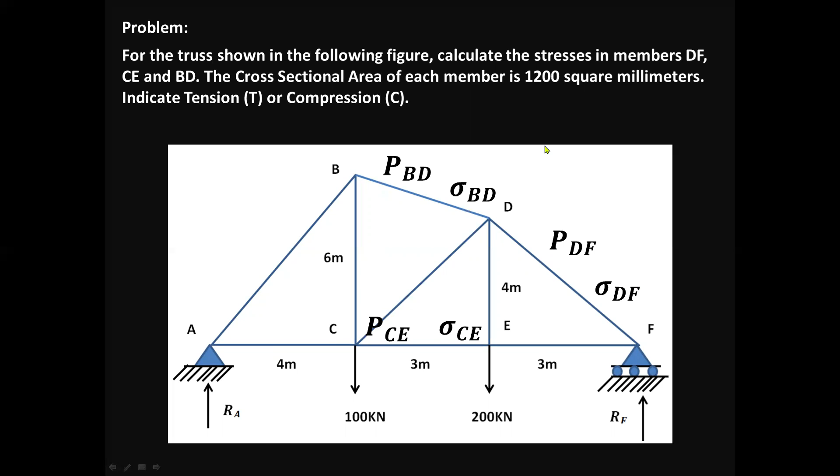Makakalkula lamang natin ang mga sumusunod kapag ating na-accomplish ang ating first step. Ano yung first step? Kailangan nating makalkula ang mga reactions natin sa ating given truss, ang R sub A at ang R sub F. In order to do that...

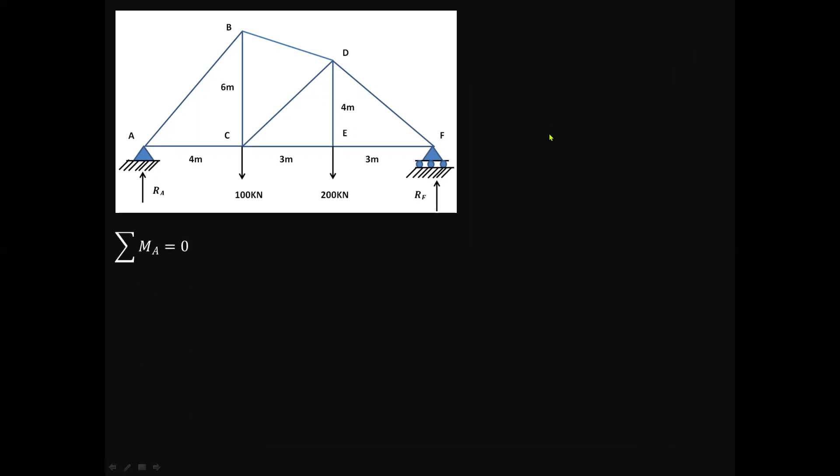Siyempre ito muli ang ating drawing na ating kailangang bigyan ng analysis. Analyze natin kung paano natin makakalkula ang R sub A at ang R sub F. Una sa lahat, summation moment at point A is equal to 0 at ang ating assumption, clockwise moment positive. Negative R sub F times 10 meters plus 100 times 4 meters plus 200 times 7 meters equal to 0.

Bakit negative ang R sub F? Ang R sub F natin ay upward ang direction, kapag yan ay ating na-rotate, ang pinakamabilis na rotation ay actually counterclockwise. Dahil counterclockwise yan at against o opposite sa ating assumption, definitely we will use negative sign.

At ang layo ng R sub F from point A is 10 meters. 100 kilonewton, ang rotation is clockwise if we're going to rotate it. Ang perpendicular distance nito is 4 meters. That is why positive ang ating sign. So we have now plus 100 times 4 meters.

How about the 200 kilonewton load? Ang rotation nito is clockwise. At ang layo nito, 4 plus 3, so we have 7 meters from point A hanggang point E. That is why we have our equation now as negative R sub F times 10 meters plus 100 times 4 plus 200 kilonewton times 7 meter equals 0.

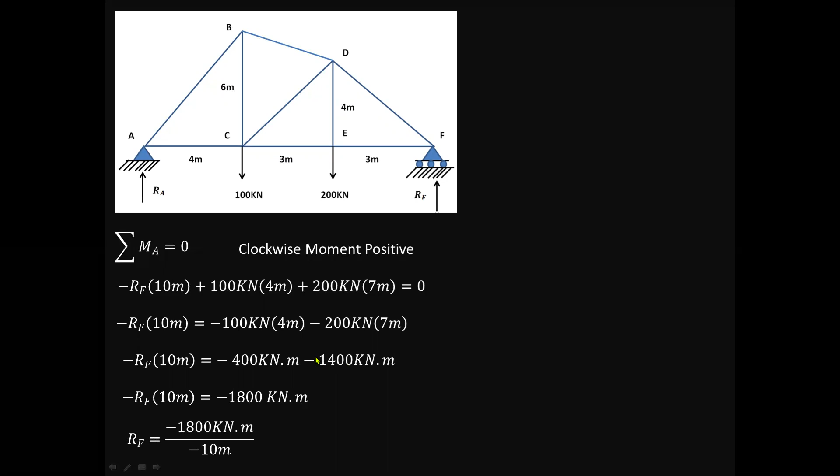Dividing the entire equation by 10 meters, we have it now as R sub F equals negative 1,800 kilonewton meter divided by negative 10 meters. Negative over negative is positive. Cancelado, both numerator and denominator ang meters, so ang matitirang unit na lamang is kilonewton. Ang value ng ating R sub F, ang ating reaction force at point F, is 180 kilonewton.

Next move, summation forces at Y is equal to 0. Ang R sub A natin is upward, therefore this is positive. R sub F is also positive. 100 is downward, we will use negative. And 200 kilonewton is downward, so we will use negative. At syempre, ito ngayon ang ating working equation: R sub A plus R sub F minus 100 kilonewton minus 200 kilonewton is equal to 0.

Now, simplifying our equation, may value na tayo ng R sub F, which is 180 kilonewton, so substitution tayo sa ating R sub F. Ang ating equation ngayon is R sub A plus 180 kilonewton minus 100 kilonewton minus 200 kilonewton is equal to 0. Ang ating R sub A is equal to negative 180 kilonewtons plus 100 kilonewtons plus 200 kilonewtons. Finally, R sub A is equal to 120 kilonewtons.

Ibang paraan ng pagkakalkula ng value ng R sub A para makasiguro tayo na tama ang calculation natin sa ating mga reactions. Maaari naman tayong mag-take summation moment at point F equal to 0. Again, clockwise moment positive ang ating consideration.

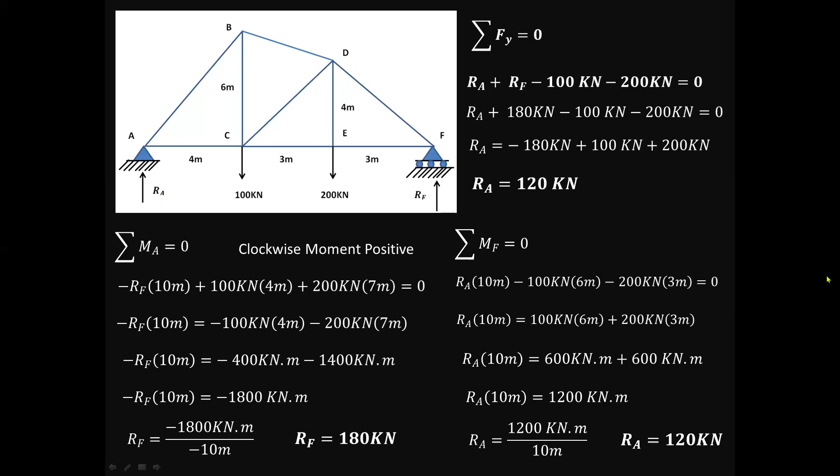So ayan uli ang ating figure. Ang diskarte dito, kailangan calculate muna natin ang ating load DF at ang stress sa DF bago natin makalkula ang ibang mga stresses. Nagsimula ako sa point F kasi nga malapit dito ang mga inaanap nating load DF at ang stress DF. So dito ay ating mapapakinabangan ang ating napag-aralan sa ating statics of rigid bodies.

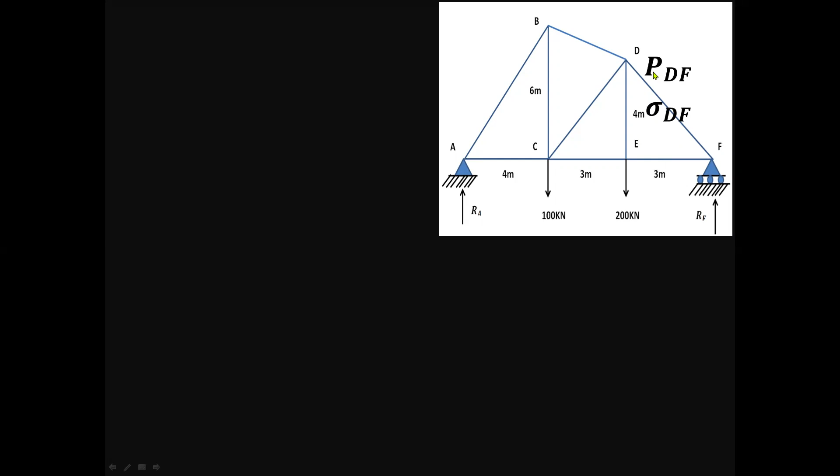Ang topic na ating i-recall, methods of joints. So considering joint F, method of joints, ito ngayon ang ating FBD. I-analyze natin ang ating mga vectors. We have assumed na ang PDF is toward the joint. PEF is away from the joint F. At syempre yan ang ating reaction at point F.

3 and 4 ang ating mga slopes na may hypotenuse na 5. If we're going to take Pythagorean theorem, ang mahanap nating hypotenuse para sa ating slope is 5.

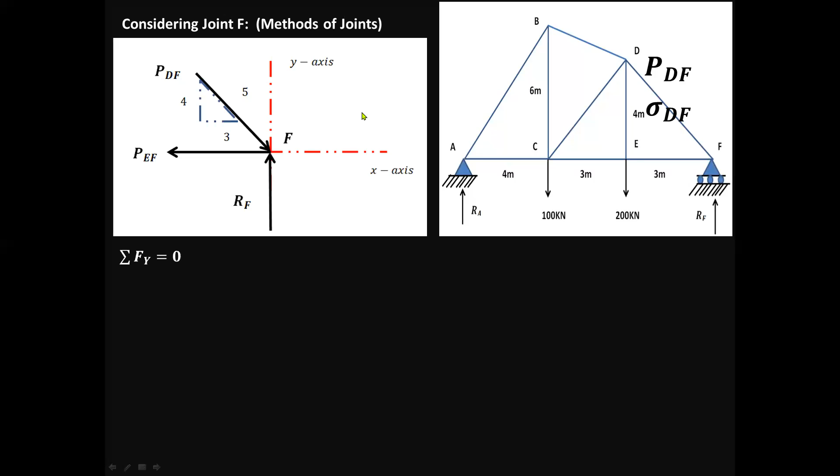Continuation ng ating solusyon. Ano yung susunod na hakbang? We need to take summation forces at y is equal to 0. Next move, ang ating equation. R sub F minus 4 over 5 of PDF is equal to 0. 180 kilonewtons minus 4 over 5 of PDF is equal to 0.

Transpose natin ang ating 4 over 5 PDF sa right-hand side ng ating equation. Now we can already calculate for PDF, ang load ng ating bar DF is equal to 225 kilonewtons.

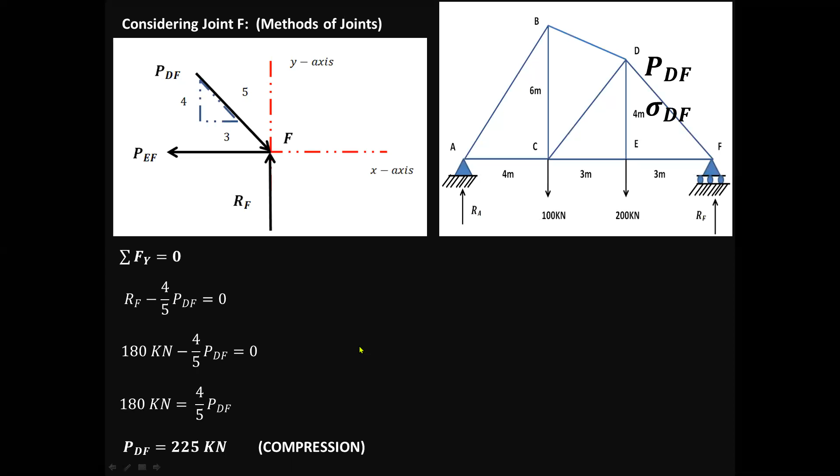And take note, dahil positive ang ating result na nahanap, ang ibig sabihin tama ang ating assumption na ang PDF is toward the joints. Ang ibig sabihin, tama ang kompresyon. Pero kapag ang nahanap natin dyan is negative, ibig sabihin, gagawin natin dapat yung positive and then magpapalit tayo kung ito ba ay compression or tension. In this case, tama ang compression na ating analysis sa ating vector or load PDF.

Ang area ng DF is given. Ang hinahanap natin is simple stress ng DF. Nahanap na natin ang ating load DF. So let's calculate.

Ang load na hinahanap natin for PDF is 225 kilonewton and we need to convert it into newtons. That is why we have multiplied to 1,000 kasi nga ang 1 kilonewton is equivalent to 1,000 newtons. And then ang cross-sectional area ng ating bar DF is equal to 1,200 square millimeters.

Ngayon ay maaari na natin calculate ang stress DF. Finally, ang ating stress para sa member DF, 187.5 megapascal. So nakadalawa na tayo sa ating mga inahanap, ang ating load DF at ang stress DF.

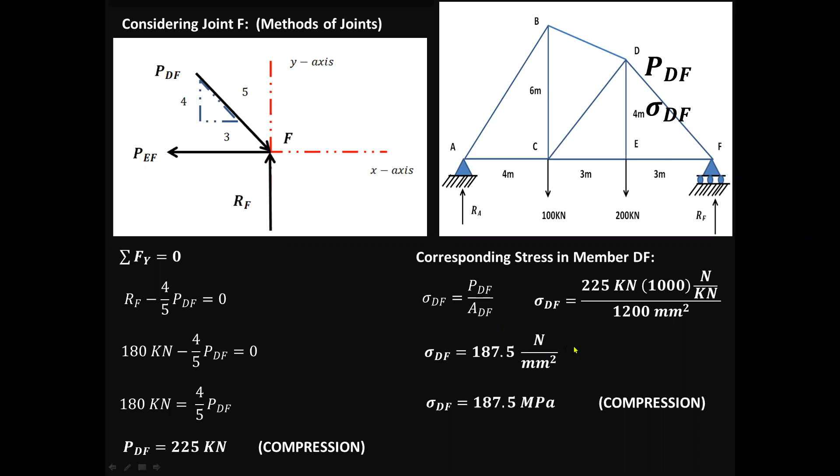Again, ang stress DF natin is 187.5 megapascal and also compression. So proceed.

Considering the left section of our truss, section AA, ibig sabihin, method of sections tayo dito. Definitely, napag-aralan yan sa statics of rigid bodies. So considering this portion of our truss, and this is actually our section AA, ito yung left. So ano yung hakbang na ating gagawin para ating makalculate ang ibang mga stresses ng ating given problem?

Una sa lahat, take summation moment at point C is equal to 0. Again, consideration, clockwise moment positive. Ano ba yung mga forces na involved? Definitely ang R sub A. At siyempre ang ating load BD. So yun ang mga forces na involved sa ating calculation.

120 kilonewton times 4 meters plus PBD times 3 all over square root of 3 square plus 2 square times 6 meters equal to 0.

Saan nanggaling ang 120 kilonewtons? Actually, ito yung R sub A value natin na ating nakalculate kanina. Ang R sub A is upward ang direction at ang point C is nasa right nito. So, ang mabilis na rotation is clockwise. That is why 120 kilonewton is positive. At ang layo nito is 4 meters. That is why 120 kilonewton times 4 meters.

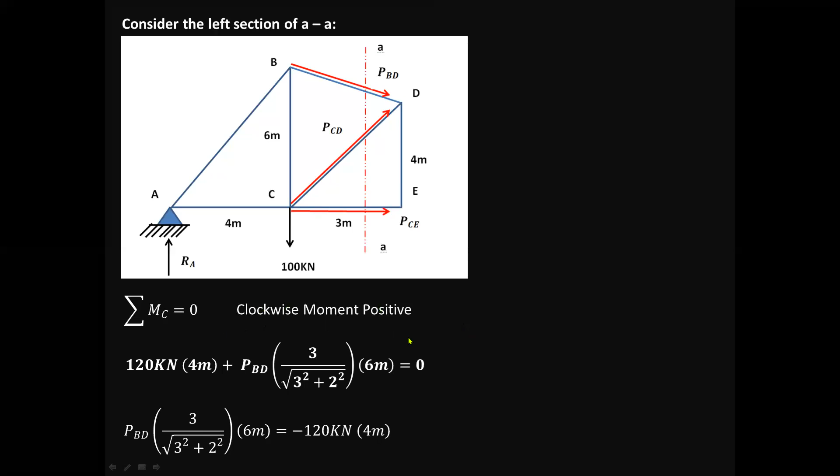PBD times 3 all over square root of 3 squared plus 2 squared times 6 meters. We have transposed 120 kilonewton times 4 meters to the right-hand side of our equation. Now we have negative 120 times 4 meters. So let's proceed.

For the continuation of our calculation, PBD now is equal to negative 120 kilonewton times 4 meters all over 3 meters over square root of 3 squared plus 2 squared, and then also over 6 meters. The value of our load for bar BD is negative 96.15 kilonewtons. We got a negative answer.

This means our assumption that it is away from joint B needs to be changed. Our arrow must be towards joint B. So instead of negative, PBD now equals 96.15 kilonewton positive. And our load for bar BD is actually compression, since it must be towards the joint, not tension.

Now we can calculate the rest of what we are looking for. We have to calculate the stress at member BD. Our formula: simple stress BD equals load BD divided by the cross-sectional area of member BD. So we have 96.15 kilonewton times 1,000 newton over kilonewton, since we need to convert kilonewton to newton. The member BD has a cross-sectional area of 1,200 square millimeters. Finally, our answer for the stress for member BD is 80.1 megapascal, and also compression.

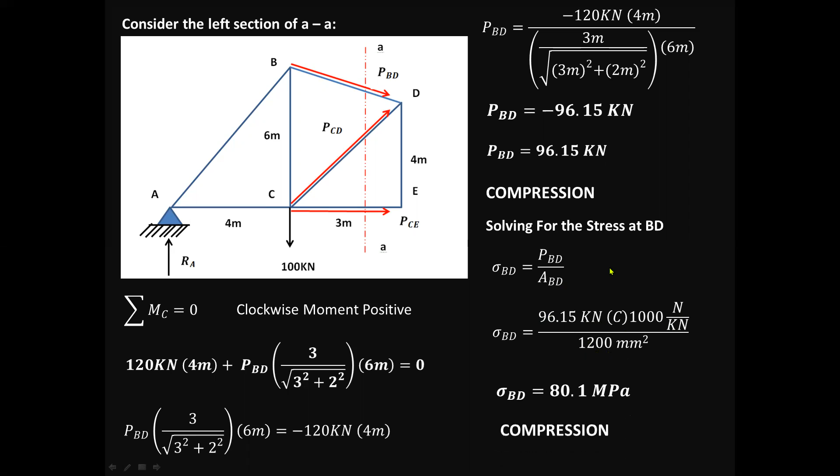Now let's proceed to the next slide. For the continuation of our solution process, still considering the left section, here again is our given figure. Summation of forces vertical is equal to 0.

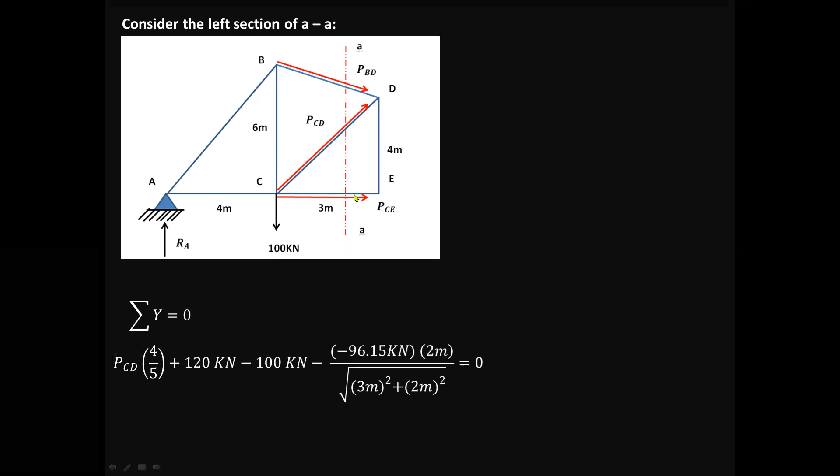We have PCD times 4 over 5, because we have to consider the vertical component of our load PCD. Upward is our force, so positive. The vertical component of PCD is upward, so we multiply by 4 over 5. Then 120 kilonewton, this is our R sub A value. Upward is the direction of R sub A, that's why positive. Then 100 kilonewton is negative.

And our PBD, when we get its component, since we already considered the arrow as away from the joint, its component is downward. That's why we used negative. We still have to consider the value of PBD as negative 96.15 kilonewton, since the sign convention here is negative. So we multiply it by 2 meters all over the square root of 3 squared plus 2 squared. And now that is our working equation.

Let's simplify. PCD is equal to negative 96.15 times 2 all over square root of 13, minus 20. Overall, we need to multiply by 5 over 4. And the value of our PCD, finally, is negative 91.67 kilonewton.

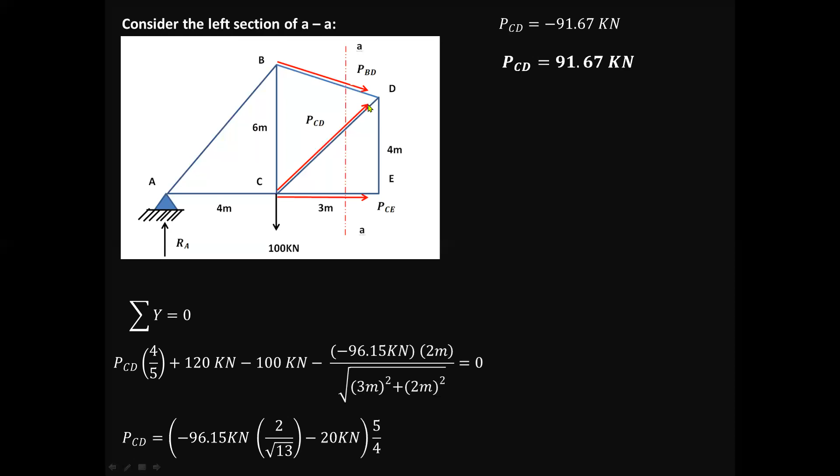Again, we got a negative sign for our loading, so we need it to be positive. This means we have to change our arrow for PCD. The arrow needs to be toward the joint. This means our assumption that it was tension needs to be changed to compression. Now let us solve for another loading.

We need to take summation of forces horizontal equals 0. PCE, correct, to the right, so positive. And the component of PBD, its horizontal component, going to the right, so also positive. PBD must be multiplied now by 3 all over square root of 13, and then plus 3 over 5 of PCD equals 0.

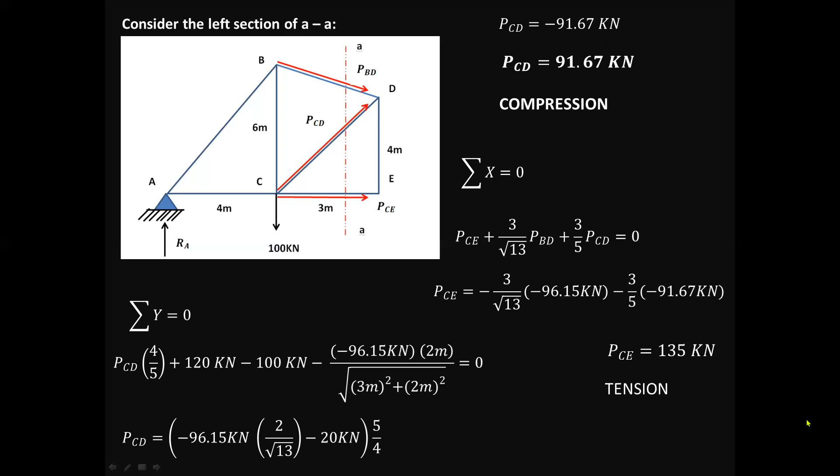Now finally, solving for the stress at point CE, or bar CE, I mean. So how do we calculate the stress at bar CE or member CE? Again, let us use the simple stress formula: stress at member CE equals load of member CE divided by the cross-sectional area of member CE.

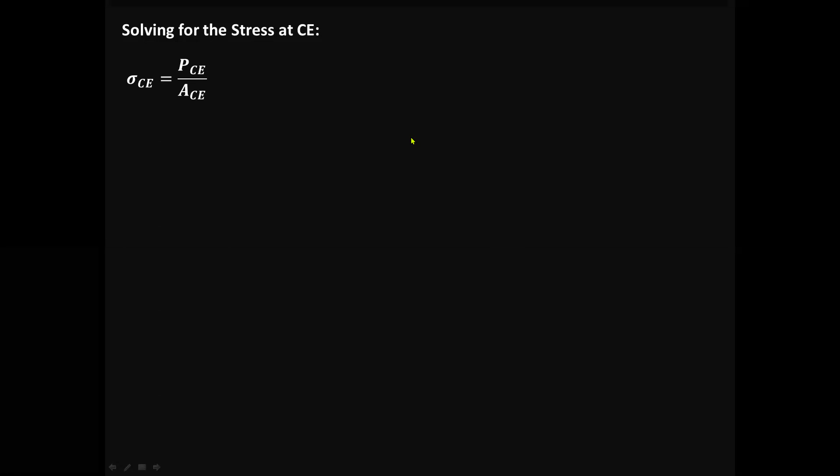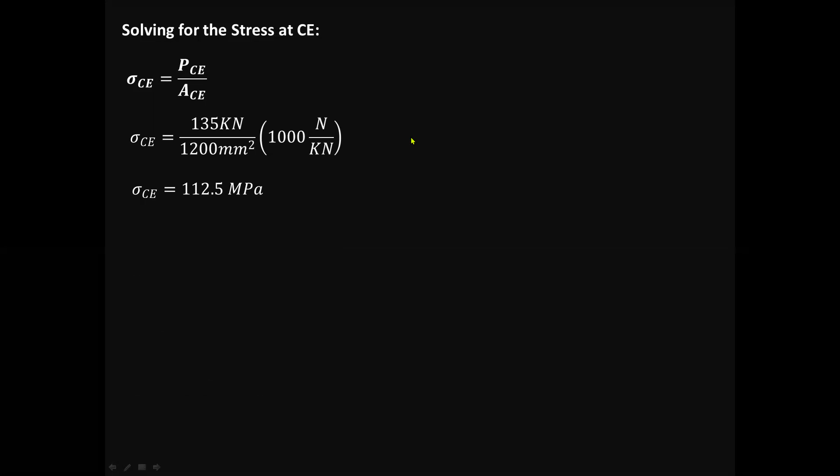Again, let's just do direct substitution here. Simple stress for member CE equals 135 kilonewtons, which we need to convert into newtons, so we multiply by 1,000 newton over kilonewton, divided by 1,200 square millimeters. Finally, that is now the value of our simple stress for member CE: 112.5 megapascal. Again, this is tension.